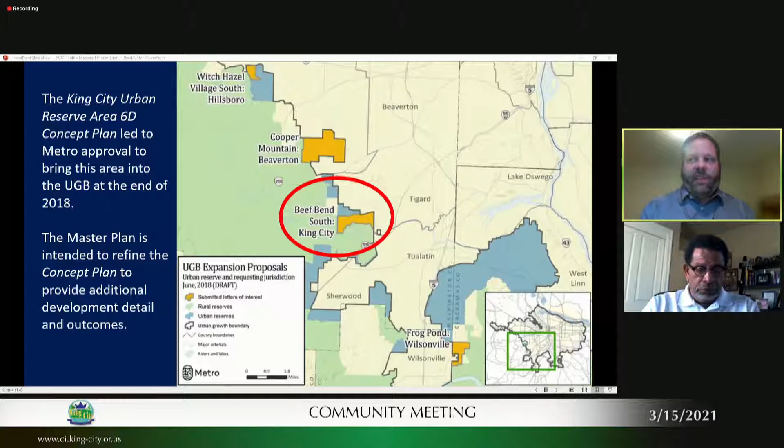Okay, let's go to the next slide. Project overview. So as many of you are aware, the City of King City completed the concept plan for Urban Reserve Area 6D in 2018, and that ultimately led to Metro approval, and Metro bringing this area into the urban growth boundary. This master plan process is intended to refine that concept plan to provide additional detail on that master plan. Let's go to the next slide.

The area you can see in red is the study area just to the west of King City city limits, bordered by Beef Bend Road to the north, Roy Rogers Road to the west, and primarily the Tualatin River to the south.

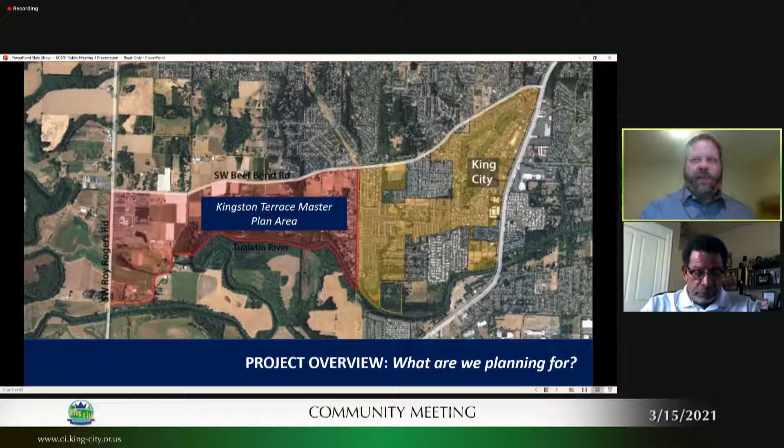Let's talk a little bit about the project process. The concept plan for this area was approved in 2018, and that included a look at baseline conditions in the area, the community vision, and preliminary design considerations. This master plan process builds on that concept plan, providing additional development details and looking at how to implement the vision established in the concept plan.

Some of the outcomes of this master plan process will include comprehensive plan and community development code amendments. People should also be aware of other projects that influence this one.

One is the King City Transportation System Plan. That planning process is underway. Maybe someone could post the website URL in our Q&A. The King City Transportation System Plan certainly influences the master plan process, and that project is underway and expects to wrap up midsummer, with information from that process incorporated into this one.

Mike, did you want to say something? I was just going to say that the TSP is having, I believe, another open house in April, perhaps toward the end of April. The other thing is, I can't figure out how to add that to the question and answer. You'll have to do it on your end, I think.

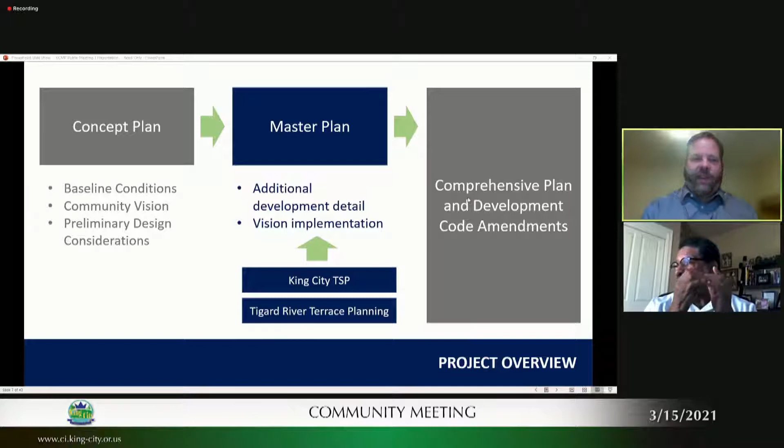All right, let's go to the next slide. This project, the Kingston Terrace Master Plan project, began in the fall of 2020, or at least that's when we officially started our work. At the beginning, our focus was studying existing conditions, getting our public involvement and basic public involvement materials together, and the advisory committees together. We'll talk about that more in a minute.

We finished the draft existing conditions study late last fall, and then spent the beginning of this winter, these last few months, gearing up for this public engagement program. That's where we are tonight, at the beginning of winter 2021 and community meeting number 1. This project is expected to extend all the way into December of 2021, so this is, I think, all in all about a 15-month process.

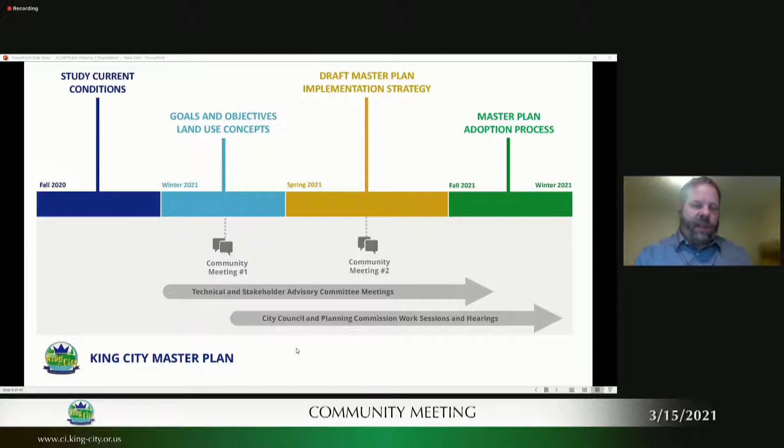You can see there are plans for 2 community meetings, but there will be other opportunities to participate throughout the process. This is the first of two of the larger community engagement efforts we'll have throughout the process. Go ahead to the next slide - public involvement.

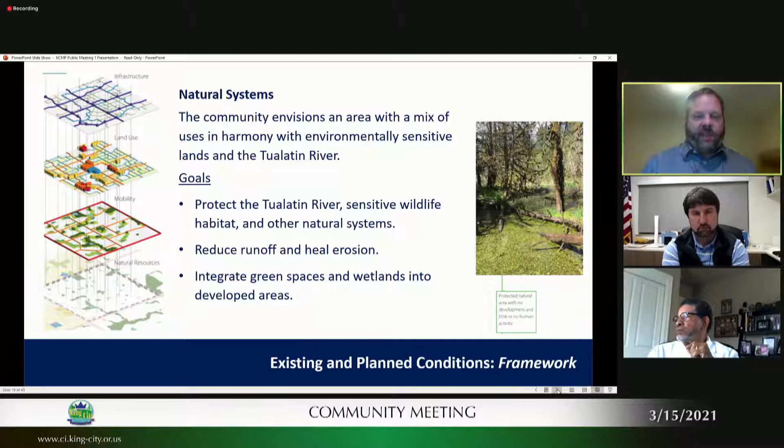In terms of our existing condition study, some key findings—this will not be a surprise to many of you—the area is moderately sloped and generally drains from north to south. Most of the drainage corridors, and we have five in the area, are believed to be in an advanced stage of degradation. So that's something we're paying close attention to.

The recommended strategy in looking at stormwater is to make use of regional stormwater facilities, and that's something we'll continue to discuss within this project and also with the city of Tigard. The consolidation of regional stormwater facilities to serve River Terrace, Tigard River Terrace, and our planning area should be considered, but will require further coordination, and that's something we're working on.

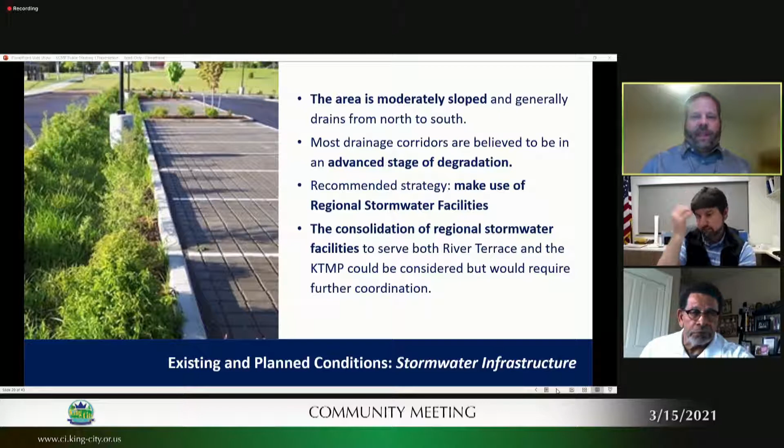Next slide. Let me grab my notes here.

So of note in this area, we have several natural resources and environmental protection considerations. One is streams and wetlands. We've done a preliminary review through site visits, aerial photo review, and GIS mapping. We know there are 6 streams and several small wetlands in the master plan area.

If Clean Water Services standards are adopted, there will be buffers ranging from closer to 15 feet to hundreds of feet for the Tualatin River itself. But each of these drainages will have a buffer that just depends on the size of the drainage area and the slope adjacent to the resource.

In addition, it's likely that Clean Water Services will implement standards to address stormwater flow management. One method for detention management could allow for the use of the stream channel to help maintain natural stream functions rather than using upland areas. But we're very early in the planning process and are actively working on looking closer at these different stream corridors and how we can meet those goals of restoring and enhancing them as best we can.

Floodplains: the areas adjacent to the Tualatin River generally contain mapped 100-year floodplain boundaries. West of Southwest Elsner Road are several areas of mapped floodplain. There will be substantial restrictions related to development in floodplain areas, and a more detailed hydraulic analysis could be required. We'll be refining these floodplain areas as time goes on.

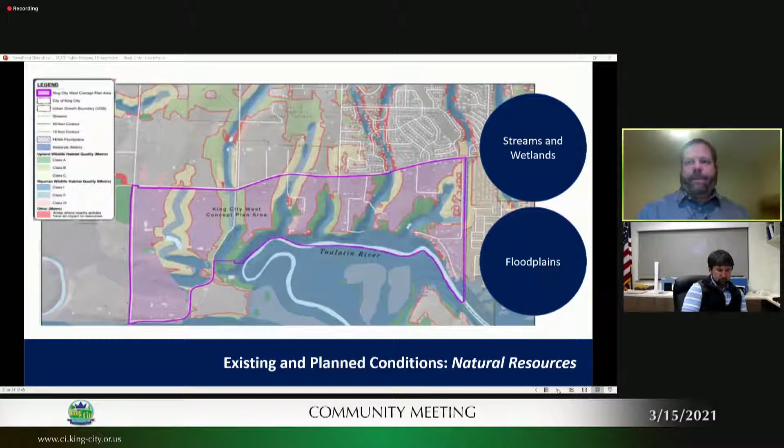We're also well aware that there are conservation easements and cultural resources in the area. There's a property owned by the Bankston Family Trust that has a conservation easement on it with Three Rivers Conservancy and Columbia Land Trust, I believe. That mandates some restrictions on the property, and we'll be working with those property owners to take a close look at that as we look at the possibility of trails and where potential roads might be located and things of that nature. Also with cultural resources, there is the Gustav Pleath House along Beef Bend Road that consists of a house and several outbuildings, and we might need to coordinate with SHPO regarding that house.

In addition, the location is in the Tualatin River bottomlands, and along the river there's a high probability of other cultural resources associated with Native peoples and Euro-American peoples. So we are in the process of working with Metro to reach out to the Confederated Tribes of the Grand Ronde and potentially other tribes. We're in the process of making those connections.

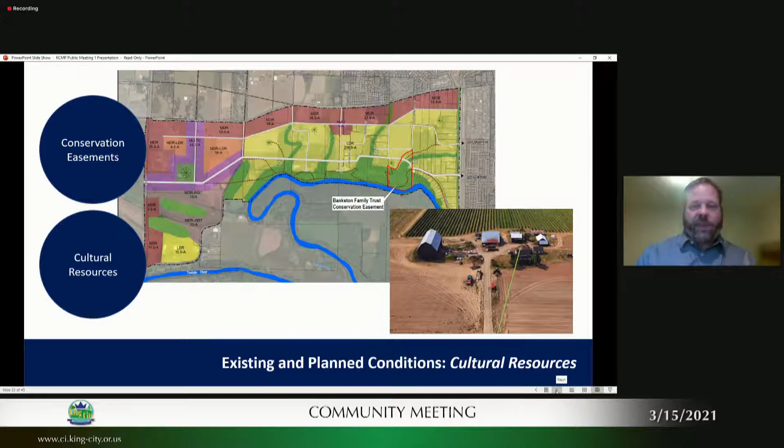Okay, that was the natural systems framework. The next framework is land use.

So the community imagines a range of housing types to support inclusive and diverse neighborhoods. Residential areas are supported by commercial and civic amenities and connections to the wider King City community and neighboring River Terrace area. A gradient of density creates 4 distinct neighborhoods, and we'll show an image of those neighborhoods in just a moment.

Goals are to provide a mix of housing to accommodate a wide range of household types, incomes, and needs; create a new mixed-use area with neighborhood scale and character; and allow for gentle transitions between rural and urban development. Next slide.

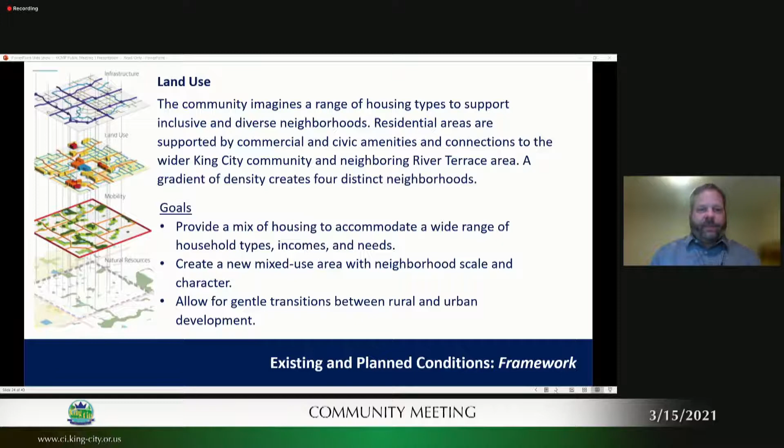So the concept plan established in our master plan existing conditions study confirmed that about 3,500 dwelling units can be accommodated in the 4 neighborhoods, which right now are just called the Main Street Town Center, the Beef Bend neighborhood, the Central neighborhood, and the Rural Character neighborhood.

And that really will allow for a spectrum of housing types with a focus on middle housing types. For those who aren't aware, recent legislation, House Bill 2001 in Oregon, requires that duplexes be allowed on all lots in single family detached zones.

So any place you can put a single family detached home, you can also put a duplex. And then other middle housing types, which include triplexes, quadplexes, townhomes, and cottage clusters are to be allowed in all areas that allow single family homes. I'm not exactly sure about the definition of how that is determined, but that is based on House Bill 2001, recent Oregon legislation.

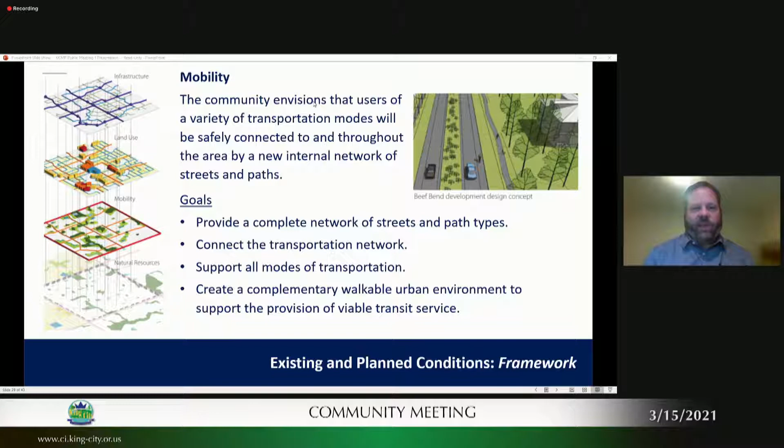As I mentioned, this plan envisions a full range of street and path types that would be used based on the context. It's called context sensitive design. You can see a variety of streets that would be used based on the context of the area—is it more commercial, or more residential? Here you can see how nature can be integrated as well, so a variety of street types to choose from.

Some key transportation challenges: the east-west alignment of Beef Bend Road is still somewhat of an unknown. Looking at meeting landowner needs and expectations, working around the Bankston Conservation Easement, regional trail connections for the west side, and Tualatin River connections. North-south alignment of and connections to River Terrace are something we're thinking a lot about—and again, that connection across Beef Bend Road, making it a bridge between communities and not a divider.

And then urban design objectives, like streets that suit our urban design objectives while meeting transportation and safety needs and goals. So trying to balance the feel and livability of the community with road requirements that come from the county and state.

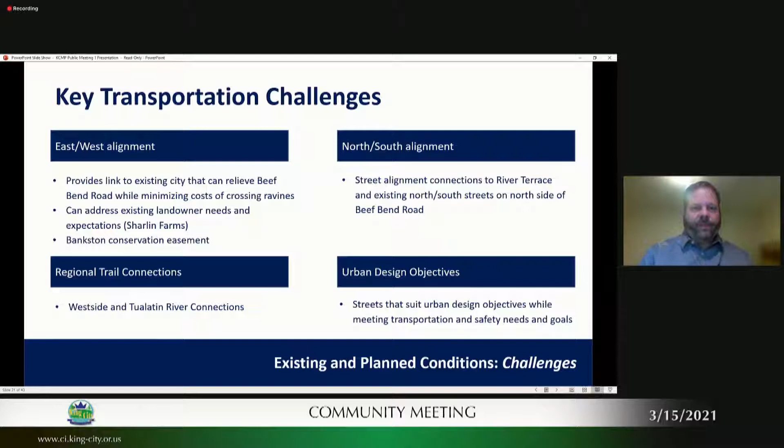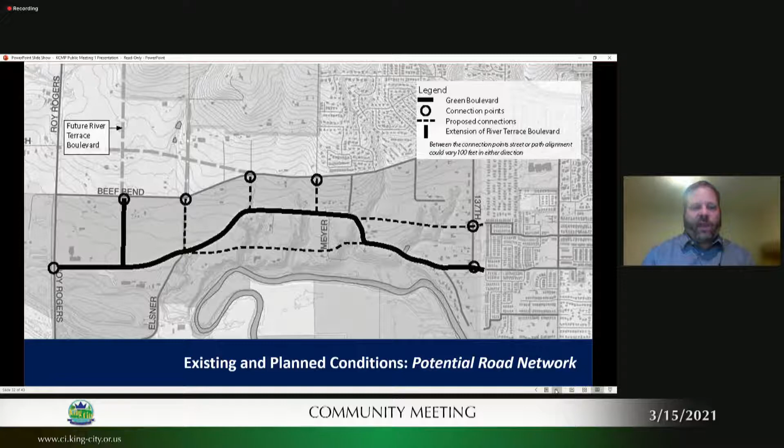Public utilities and services, the fourth framework. Infrastructure development in the area will align with the gradient of density we showed earlier from east to west, and integrate stormwater management and mitigation throughout. That's the first of the goals—reducing runoff and healing erosion, using best practices for stormwater management and mitigation.

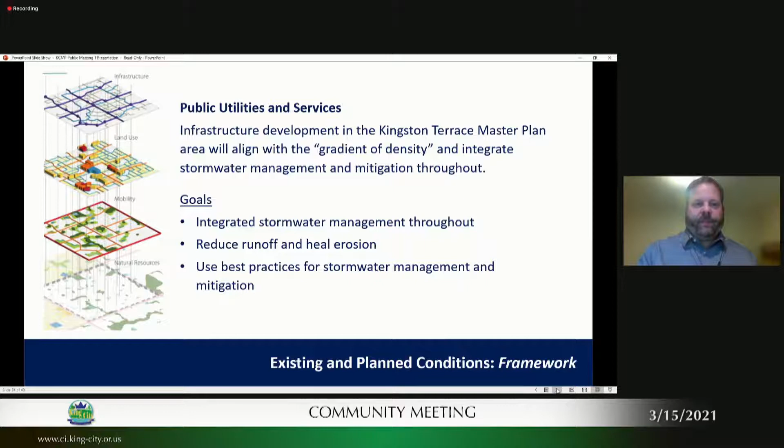The city of Tigard will provide potable water service to King City. Tigard's water supply facilities are adequate to supply that water through 2050 to this area. The recommended strategy includes main extensions and increased storage capacity—so a lot of infrastructure work to be done.

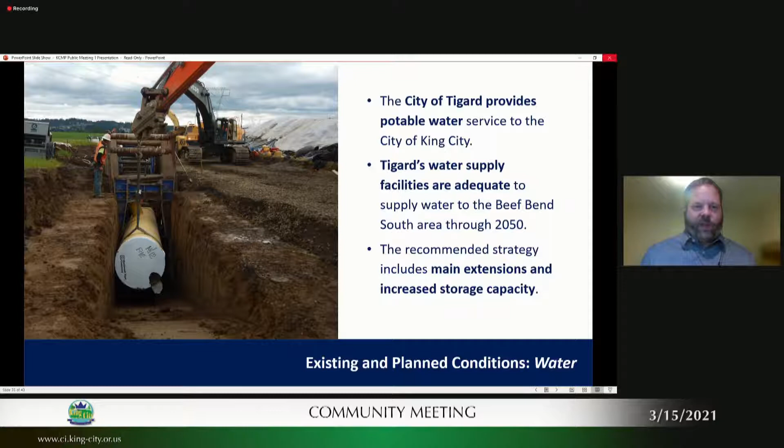Clean Water Services' regional facilities are adequately sized to receive and treat wastewater generated from full build-out of the plan. A new local collector system will be required to convey wastewater into the Clean Water Services system. It may require some upsizing and new sewers in King City to serve existing and future development north of Beef Bend Road. An alternative regional strategy may include relocating the existing Bull Mountain pump station—again, that is yet to be determined.

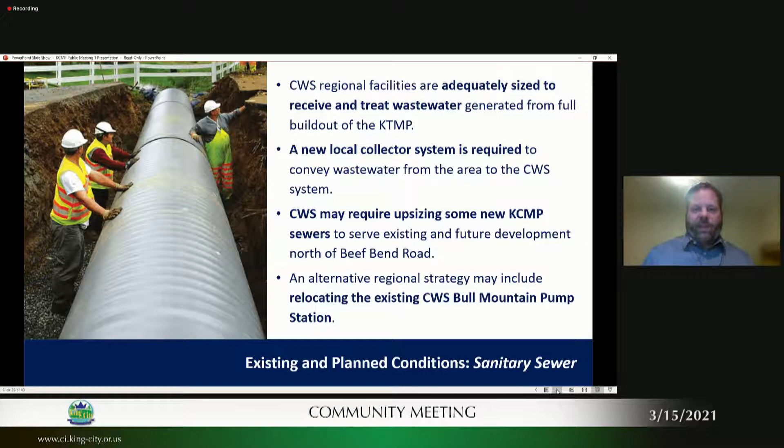Opportunities and challenges: natural systems. We went through the natural systems, the land use, the mobility, and the public utilities and services. I'm just going to go over a few more items, and then we'll dive into more questions and comments from all of you and spend the rest of our time doing that.

As we go forward and start to develop alternative land use and transportation plans for the area, some of the things we know we need to be sensitive to: the Tualatin River and surrounding natural areas, and that there's at least 318 developable acres. We think as those natural areas are further defined there's going to be more than that, but we think as a baseline there's at least 318 developable acres. We can accommodate about 50,000 square feet of commercial uses within the 10 to 20-year horizon, and we can accommodate those 3,500 dwelling units within the four distinct neighborhoods.

We intend to locate higher density residential near transit, which will also be located near that town center—so that's where the transit routes will be, where there's more people. We're going to look to provide a spectrum of housing types, and again that's by design from the concept plan, but also now by state law. Looking at perpendicular crossings at the narrowest portion of those ravines where ravines have to be crossed, and then looking to pedestrian and bike network connectivity.

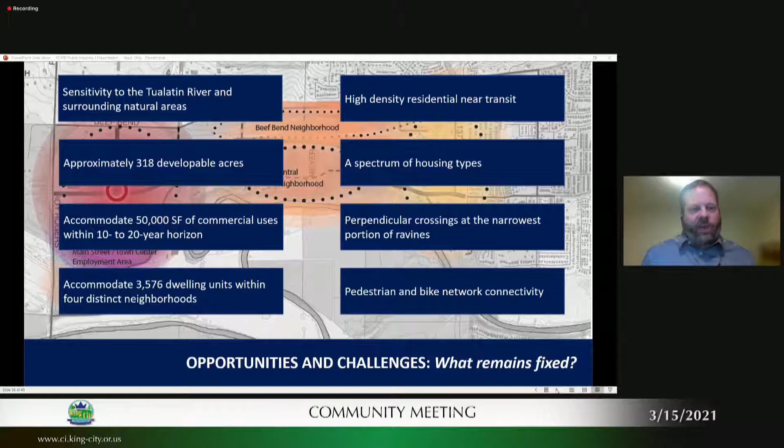Where exactly - we know the town center is going to be located on the west end of town, but the exact location and its orientation relative to Beef Bend Road, Roy Rogers Road, and River Terrace Boulevard remains to be determined.

East-west connections: both the final route of Beef Bend Road and a potential secondary east-west connector are to be determined. North-south transit connections: we don't know exactly if transit will be coming down Beef Bend Road or River Terrace Road, so that is to be determined.

Ravine crossings - how many will need to be crossed, and will it be by bridge or culvert? Future development around the Bankston property and airfield areas remains to be seen. Local street alignments have yet to be determined, along with drainage areas and topography, and gravity pipelines across those drainages - what will those sewer alignments be?

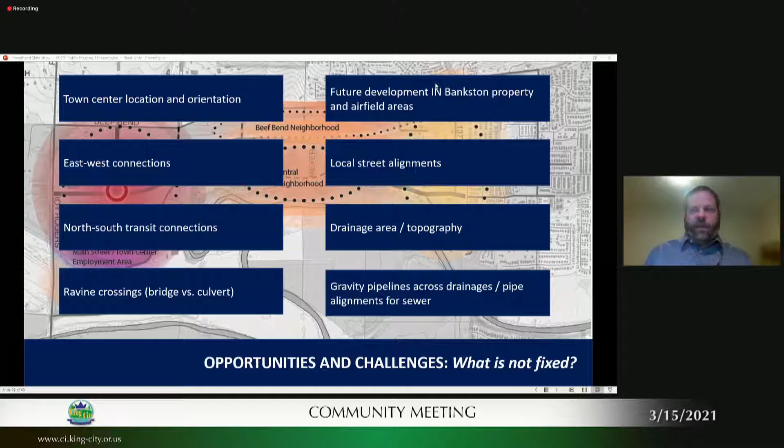So with that, I know that Mike has already been answering questions. Mike, do you want to let me know where we're at in terms of questions and comments, and I can try to get caught up here?

Why are you proposing a major roadway through conservation property? The only roadways we'd consider major or arterial are Beef Bend and Roy Rogers, so I assume this person is talking about Fisher Road. That would be considered a local road, and we don't know the alignment of that right now. We are looking to provide a secondary connection, but the exact route is unknown at this time.

And then the last one I have from Mr. Russell - have we taken any tours? Mr. Johnson, I believe, asked a similar question earlier.

Yes, we have taken tours of the area. We have walked through and down that way. We've seen aerials and photographs of the Bankston property, but no, we haven't walked it. So I should answer that.

I'll answer a few. I see Mr. Russell's question - I know you and the councilors have toured, and I'd say some of our consultant team has toured parts of the area and some have not. So we have differing levels of familiarity, but a lot of our team worked on the concept plan and has some familiarity from there.

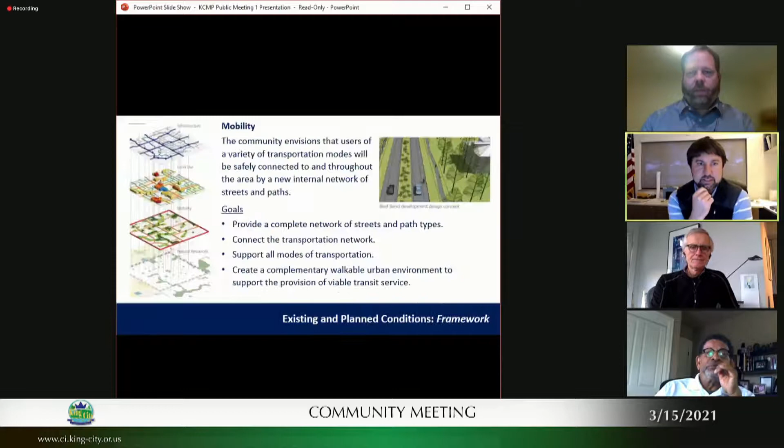That road that comes in at the top, just south of Mountain View, Mobile Estates - I don't remember the width exactly, but since we have parking on one side, I'd guess it's probably 28 feet wide, which is our typical standard. I think Fisher was built to 36 feet. If anyone is familiar with Macbeth, you understand you can barely get one car down there, so it's not an ideal option.

That's why I think Fisher rose to the surface in our concept planning. But we're starting to talk about transportation stuff - this is a master plan, so the transportation details are what we're dealing with in the transportation system planning effort. All right, next question.

It looks like the Tigard development has a commercial area lined up away from Roy Rogers, but with an outlet on Beef Bend, so this must be Tigard River Terrace. This doesn't align with our planned commercial area. Any thoughts on the impact of that alignment, or does it align and the maps just aren't quite representative?

We are aware - you can't see my cursor, but the street just east of Roy Rogers Road, that's River Terrace Boulevard. We are aware that, at least in the concept planning phase, Tigard is planning for a commercial area just north of Beef Bend along that corridor. As mentioned earlier, we're aware of that and taking it into consideration as we figure out exactly where the commercial portion of the town center will be located.

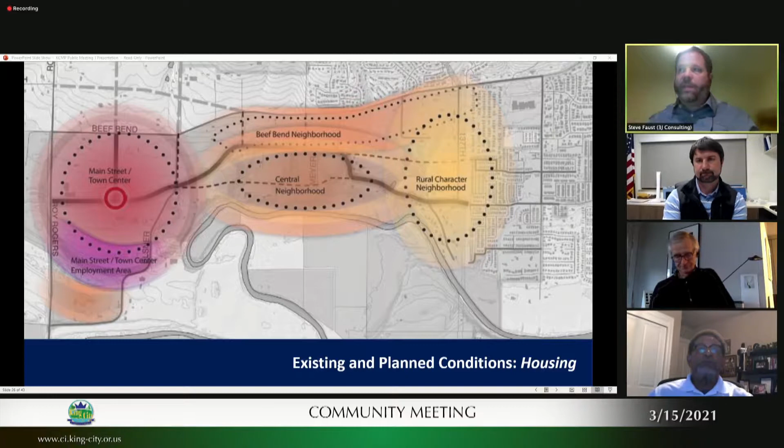Thank you. Let's see here. Is Rivermead Park going to become a public park?

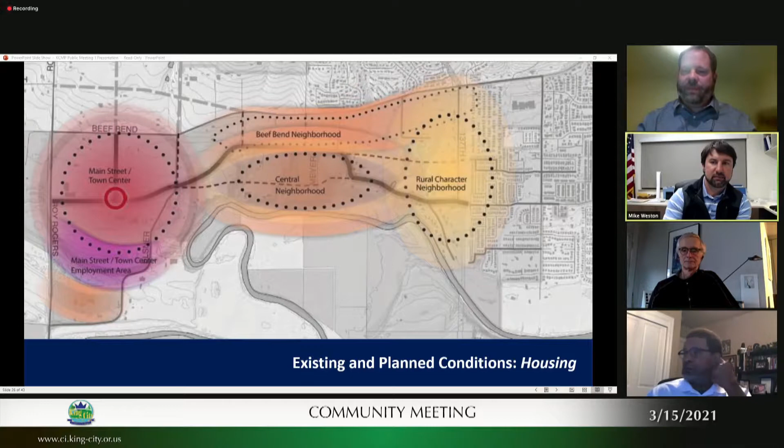I don't believe we have any plans whatsoever to touch or deal with that. There's no plans to condemn it, no plans to consume it or take it over. King City does not have anything to do with that park at this point in time.

Mike, can you repeat what you said earlier about access to the wildlife refuge and a bridge? There might have been some misunderstanding of what that is exactly.

Okay, so the West Side Trail, if you haven't looked into it yet, I would encourage you to look into it. It's a trail that goes from Portland on the other side of 26, up over Skyline, all the way down, following the Bonneville and PGE power lines all the way up and over Bull Mountain, down to the other side, and goes right through our area from Beef Bend down to the Tualatin River.

It crosses the Tualatin River and goes to an area called Heritage Pines. That's technically Tualatin area there. It also hits into the wildlife refuge on the other side of the river. So that pedestrian bridge would provide that sort of access across that way.

And I believe that is a regional MSTIP path. Well, it's a regional path through Metro. It's one of Metro's regional plans, as well as Washington County's.

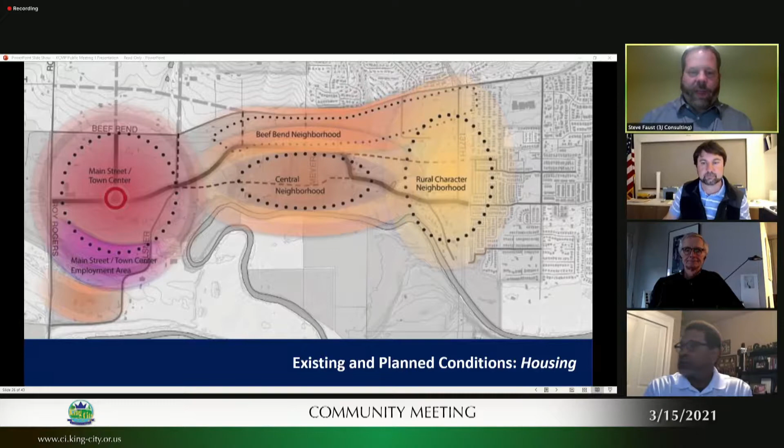So again, really encourage everyone to visit kingcitymasterplan.com. A lot of information, presentations from the Technical Advisory Committee and Stakeholder Advisory Committee meetings. I mentioned before, I don't think we have these posted there, but I know elsewhere on the King City website, you can probably access information from the briefings we did with Planning Commission and City Council. And most importantly, that's where you can access the online open house, where we provide a lot of the information about the vision for the area and the frameworks, and ask questions, both multiple choice questions for you to answer, as well as open-ended ones.

So you can share any thoughts that you have. We want to make sure that we had a balance of closed-ended questions and open-ended questions to make sure that you can share whatever questions and comments you have.

We're in the process of conducting stakeholder interviews. We'll be doing that throughout the end of the month. And then our team will take all that information and summarize it, and we'll post a summary of all the community engagement comments that we've received. We'll post that to the project website. We want to be as transparent as possible. And then our plan will start to develop alternative land use and transportation plans for the area. And then there'll be another round of advisory committee meetings and another opportunity to comment online towards the end of April and early May. So keep an eye out for that.